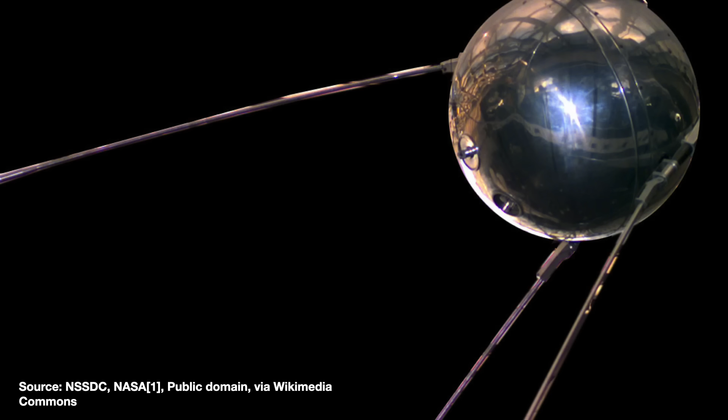But by 1958, things had changed, in part thanks to the launch of Sputnik. The locals were also excited by the possibility of receiving energy from Hanford. So the proposal made it into a larger bill, and Eisenhower reluctantly signed it, thus allocating money for the construction of a new plutonium reactor called the N Reactor, or New Production Reactor.

Unlike Hanford's other reactors, this produced both plutonium for nuclear weapons and high-pressure steam that could be used to generate electricity. Nobody in Congress opposed the plutonium part, lest they look weak on national security. But coal and private utility interests killed congressional funding for building the steam-generating part of the facility.

The Washington state government looked into picking up the slack, but passed as well. In early 1959, Washington Supply System was in the midst of locking down the project for Packwood Lake. Flush off that success, Managing Director Owen Hurd, with authorization from the board, starts investigating nuclear power.

They eventually put themselves forward as a partner with the AEC to fund and build the 800 to 900 megawatt power plant. To get congressional opponents on board, Washington Supply System lobbies and offers to sell half the power generated to private utilities. With popular support rising, this revised Hanford generating project passes in 1962, and President Kennedy signs it into law.

If you really think about it, the whole thing is a bit crazy. Washington Supply System was just a few years old, was run by a thin staff of local utility operators, and did not even have their own engineering staff.

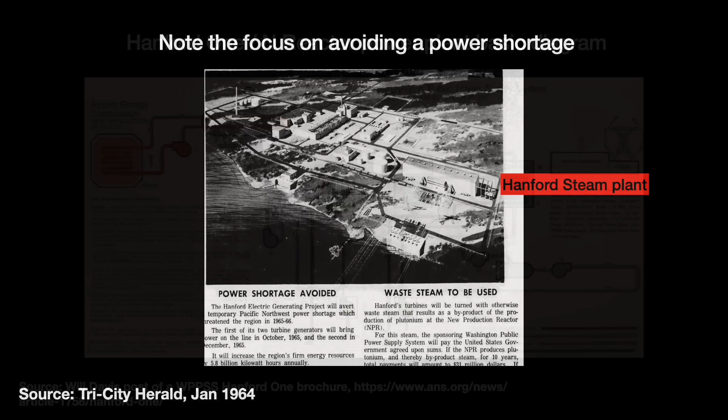At startup, the plant was the country's largest civilian nuclear power plant by a large margin. It was a massive installation with 8 pipes bringing hot steam to what were then the 2 largest turbine generators in the world. In 1967, Hanford single-handedly accounted for 43% of the country's nuclear power.

Washington sold $122 million of bonds at a 3.26% interest rate to fund the construction. The project was finished below budget, and the extra funds used to retire outstanding bonds. Despite the labor disputes, the whole thing can be called a pretty good success.

Being associated with such a massive plant brought untold prestige, and soon enough, Washington Supply System starts calling this generator Hanford 1. A key assumption that Washington Supply System and the rest of the utility industry operated under in the late 1960s was that energy demand would grow.

Per analyses and forecasts made by the AEC, electrical loads in the region had grown at an average of 5 to 7% each year, and there seemed to be no reason that the trend wouldn't continue. The number of residential customers had grown 2.5 times between 1937 and 1967, and the kilowatt hours those customers used grew from 1,200 to 12,200.

Commercial and industrial customers' loads were growing just as fast, or even faster. Industrial customers used 90 times more power in 1967 than they were in 1937. Nobody questioned the assumptions behind these trends or the validity of the projections. Utilities instead worried about where to get the power to meet those needs.

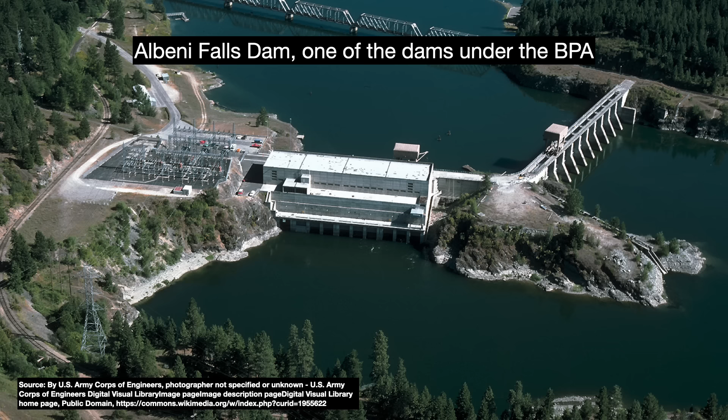The Pacific Northwest region lacked reserves of good fossil fuels, and the number of ideal sites for new hydroelectric power plants was dwindling. So the only scalable alternative seemed to be uranium. In the late 1960s, the BPA's administrator brought together all the region's utilities and discussed the need for nuclear energy to meet all that demand.

After several years of wrangling, the group unveiled the hydrothermal power program, a sprawling 20-year plan covering the years from 1970 to 1990. Phase 1 called for 7 large plants to be built from 1970 to 1980, a mix of coal and nuclear plants. With the BPA, by law, unable to build them, Washington's supply system quickly found itself responsible for building 3 nuclear plants. First, WNP2 committed to in 1971, and then WNP3 and WNP1 in 1973.

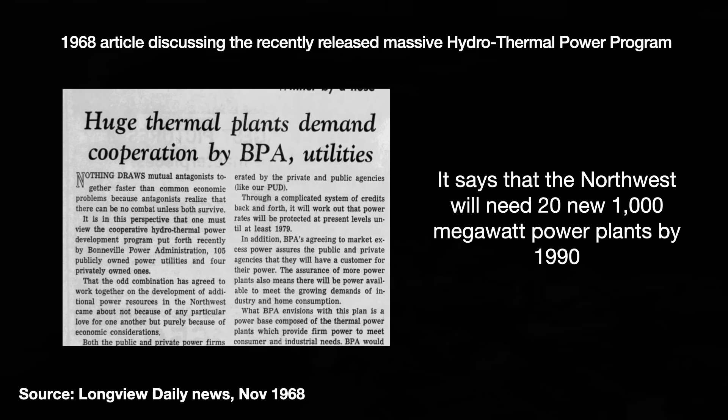Looking back, it feels like an overreach. But it is important to note that Washington's supply system felt a civic duty to go where others cannot. The Hanford 1 job, which both the U.S. federal and Washington state governments turned down, is a prime example.

Moreover, it was the start of the golden age of nuclear energy. After an initial hesitancy, utilities were adopting it wholesale, with 31 plants announced in 1967 alone. The TVA announced 17 by themselves. And even if Washington overbuilt a little bit, what's the big deal? The thinking of the time was that nuclear would make power, quote, too cheap to meter, end quote. Any extra capacity can be used to lure another aluminum smelter to town.

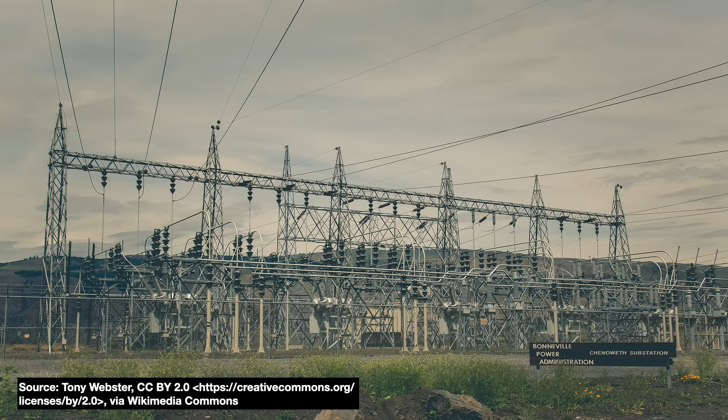Finally, the BPA threw in another safety net called net billing. Explaining this in full would be a bit tiring. The short version is that net billing means the BPA commits to buying nuclear power, more expensive than its hydropower, and spreads out the cost difference across all of its utility customers. Net billing is meant to help spread out the high cost of building new power generating sources across a wide population, and from a development standpoint, I get it. But it also commits every utility customer to the plant, and critically that holds even if the plant is never built. Basically, as soon as things got rolling, changes had to be made.

In October 1970, Washington's supply system had to relocate the 1,100 megawatt WNP2, initially estimated to cost $500 million, from its original planned location at Roosevelt Beach. National Park staffers wanted a 6-year study to see whether the plant's hot water would affect the local clam population. So, WNP2 was relocated to Hanford, where the environmental studies had already been done.

A few months later, in January 1971, Washington's supply system received an unpleasant call from the federal government. The Nixon administration was cutting spend, and with plutonium needs declining thanks to arms agreements, they wanted to shut down Hanford 1's N reactor and the 860 megawatt power plant attached to it. A furious lobbying effort followed.

Various players in Washington state said that the shutdown would create a power crisis in the area. Ordinary people sent letters to the government asking to reverse the shutdown. A compromise was reached in mid-1972. The old N reactor can run for a few more years, but since its weapons capability cannot be practically removed, the whole thing had to go.

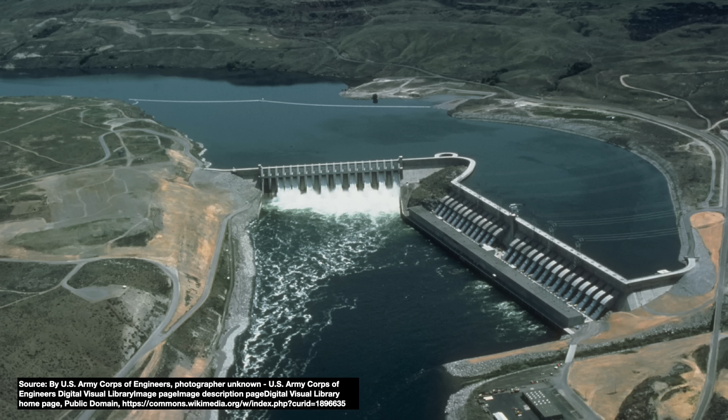In the late 1960s, people talked of an impending energy crisis. Then, in the 1970s, it seemed like those days had come. A light snowpack in 1972 meant less water for the region's hydropower dams, causing factories to shut down. Then, in 1973, came the Yom Kippur War and the resulting oil embargoes, with gas rationing, conservation programs, and so on—you know the deal.

People at both the BPA and utilities believed that 1973 would be just the beginning. The only thing to do was push forward to phase 2 of the hydrothermal power program and build more nuclear plants. The hope was that twinning WNP4 and WNP5 with WNP1 and 3 at Hanford and Satsop could realize some $400 million of cost savings.

At the time, the feeling about progress at the 3 plants was that they were slow but on the right track—a feeling that later turned out to be incorrect.

With net billing no longer available, utilities were asked to commit themselves to building the plants, then estimated to cost $2.25 billion. With the BPA's aggressive help, including a potential threat of shutoff by 1983, 88 utilities signed an agreement by 1976. One major exception to the trend was the big utility Seattle Light, which owned its own hydropower stations.

Seattle Light was not heavily dependent on the BPA. They asked the Seattle City Council for authorization to buy into the WNP4 and 5 projects, and the council voted no, saying that it cost too much.

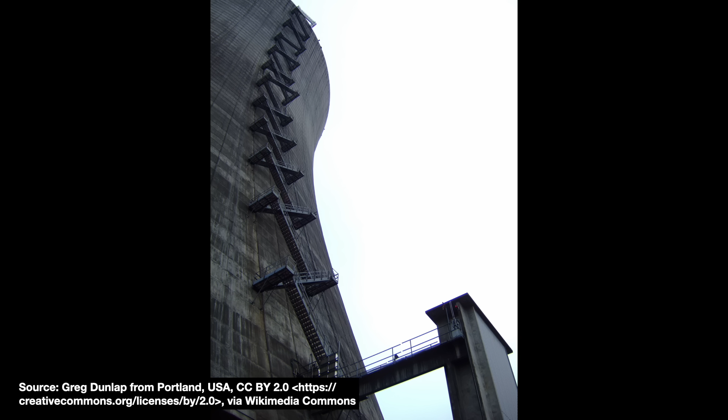There had been no data to back this assertion, and as they tried to build these new facilities, they found it was not true. In 1967, the AEC estimated that a 1,100 megawatt plant would cost $134 million. Two years later, that was revised up 79% to $240 million. That price trend would only go up in the coming years.

But those do not excuse the fact that the single biggest factor behind the debacle was Washington Supply System's struggle to manage the project within the restraints put upon it. Washington grew its staff to 500 and then 2,000 people, but even so, they were ill-equipped to handle what was without question the biggest megaproject in the United States at the time.

These 5 plants were rushed to construction with no attempt to achieve economies of scale. Consider the French nuclear industry—many of the French plants built in the 1970s had the same 900 megawatt design with the same components and shared a single supply chain. Washington Supply System's 5 plants, on the other hand, were of 3 different designs done by 3 different designers.

It was noted that a state law nominally prevented consolidation of the jobs, and no standard design then existed. Nevertheless, the savings would have been substantial.

EDF was a massive organization run by a tight-knit group of educated elites, and they kept a tight grip on the project, embedding their own people at the engineering sites and strictly refusing to take on design changes even when they seemed good on the surface.

In another major incident, in June 1980, the Nuclear Regulatory Commission fined Washington Supply System $61,000 when they discovered that the sacrificial shield wall, a protective barrier between the reactor vessel and the containment buildings, was done profoundly terribly and would not survive an accident. The issue was that bad work was being done on top of bad work.

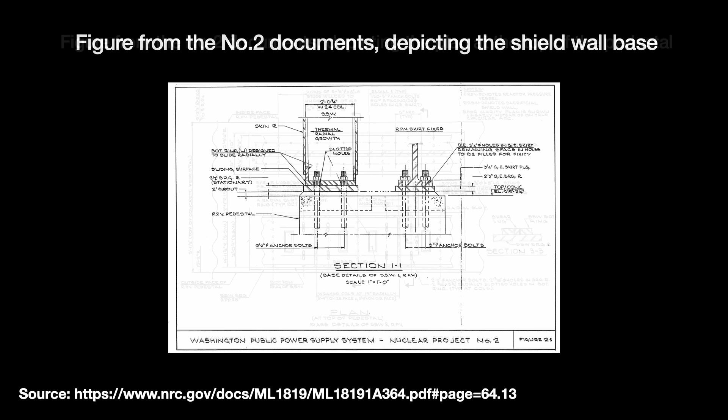Inspectors reported cracks in the wall's structural beams since 1977. Even so, 2 contractors built on top of its flawed structure. This is not on the workers, but their supervisors. Washington initially thought the fix would take 3 weeks. It ended up taking 13 months of 24/7 work by over 100 workers.

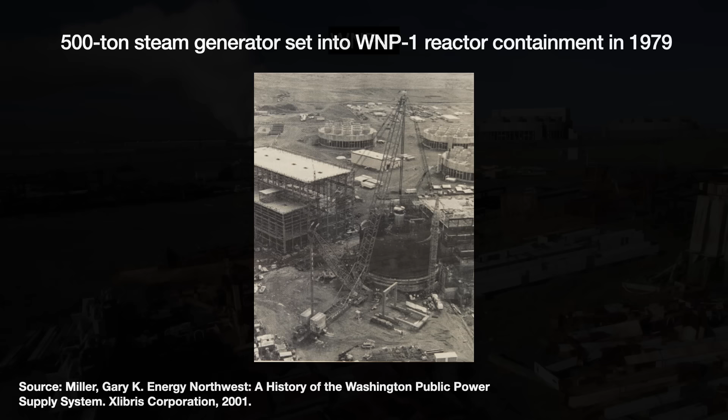There was extensive labor strife between the contractors and the labor unions doing the work. In 1976, a major strike by the Plumbers and Steamfitters Union shut down work entirely for 4 months, costing up to $500,000 each day. Washington Supply System struggled to mediate between the contractors and its unions. The unionized workers felt they were being blamed for what they thought was incompetent management, and they are of course right.

But it was a two-way street, and I should note this was the 1970s, a time of volatility, and the workers were not doing their best work. They did whatever they could get away with. Walk-offs and strikes continued throughout the next few years. Between April 1978 and July 1979, there were over 100 work stoppages or secondary boycotts, and at Satsop alone, there were 18 labor disputes in just 1979.

Then there are the things that just make you sad. The hope had been that twinning the number 4 and 5 stations would save money, but the time between construction start of these 2 build phases were so close together that none of those benefits were ever realized. In August 1978, heavy rains in Satsop washed away all the excavation work done for WNP3 and 5 into a nearby creek, adding $51 million to the cost. The area gets an average of 90 inches of rain each year.

This should have been accounted for. Then, in early 1979, came a double hit. First, the movie thriller China Syndrome, depicting a possible nuclear reactor meltdown. Then, 12 days after the movie was released, came the nuclear incident at Three Mile Island, an accident that shattered the credibility of the American nuclear industry and led to a massive revamp in the NRC's oversight.

Washington Supply System employees later blamed the NRC and its safety regulations for 50% of the project's overruns in its first 4 years. This estimate has been contested, with others instead blaming Washington's general mismanagement. The estimated price tag of $4 billion for all 5 plants had been too optimistic from the very beginning.

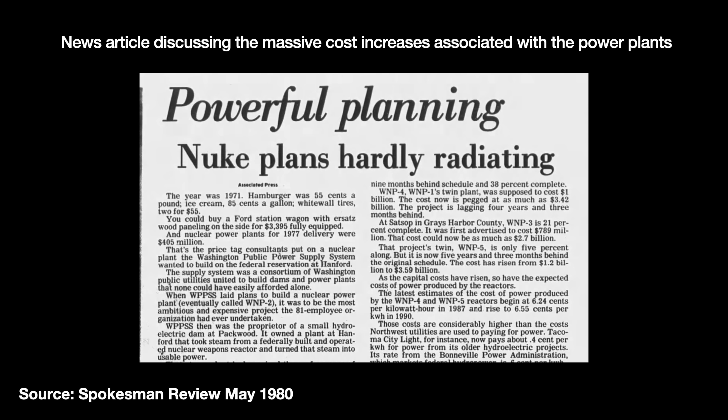At the same time, Washington Supply System's interest rates rose from 5.93% in 1977 to 11.77% in 1981. Part of this was the inflationary environment, but there were also concerns that they were selling too many bonds.

From 1978 to 1980, 20% of all the gas and electric bonds came from Washington alone. By 1980, they were selling $200 million every 45 days. Half of the company's costs were just the interest on its debt.

Worse yet, the people buying those bonds were not given proper information about the state of the project. In late 1979, a mutual fund manager reportedly toured the site himself and then immediately sold every Washington Supply System bond they had. Yet Washington kept selling $200 million worth of bonds every time, almost right up until the end.

The early 1980s saw the U.S. economy hit by a sizable recession. Unemployment rates in Washington state doubled from 1979. Lumber mills closed and electricity demand plunged.

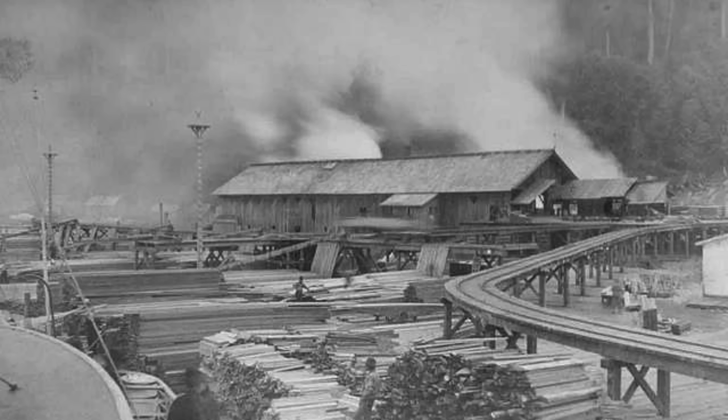With the rough economic situation, there was no possible justification to finish all 5 power plants. In early 1981, the new Washington Supply System director, Robert Ferguson, orders a ground-up cost estimate for the project. The new estimate puts the cost of completion at $23 billion, or about $86 billion today. As one estimate put it, enough to build the Great Wall of China with union labor.

Ferguson realized that the organization simply cannot do it, and recommends that the board put a 1-year moratorium on construction for plants 4 and 5. The board is shocked, feeling they had not been told about all this, but agrees.

The fallout is immediate. Wall Street analysts predict that plants 4 and 5 will not be completed. Thousands of workers in Hanford are laid off, and they protest. The ratepayers rose up in fury, suing their local utilities to keep them from paying for the plants.

In January 1982, WNP4 and 5 are canceled, but of course the bondholders still want to get paid back for the bonds they bought for those projects. The utilities and their ratepayers were on the hook, in some cases up to $12,000 per customer.

However, the Washington Supreme Court makes a somewhat dodgy ruling that the utilities and energy cooperatives did not legitimately enter the agreement for 4 and 5, releasing them from their obligations to the project. So, in August 1983, Washington Supply System defaults on the $2.2 billion of bonds issued for stations 4 and 5. It was the largest municipal default in American history up until then.